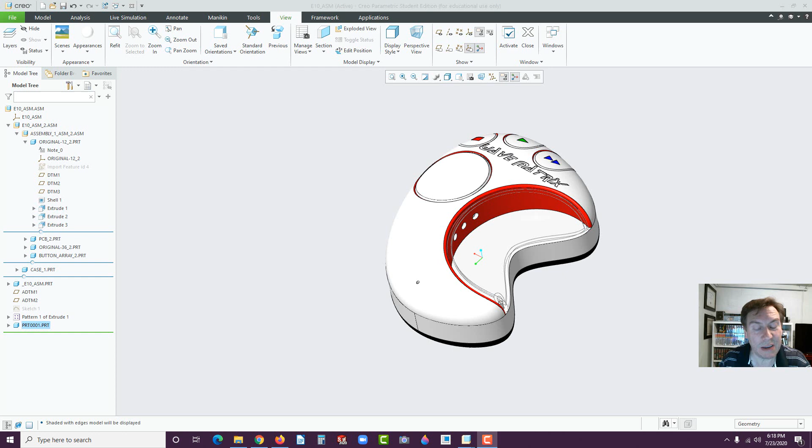In this exercise, it's what I call the real world scenario. Now, there's no way to really make that unless you're truly working at a company, but this is as close as I could bring it, you might say, without making it too overly complex and too long. Because typically projects, especially in industry, can take a long time, especially if you're handed something that's halfway through or even beyond halfway. It's almost unknown sometimes how long it's going to take. It's very difficult to judge, especially depending upon the user.

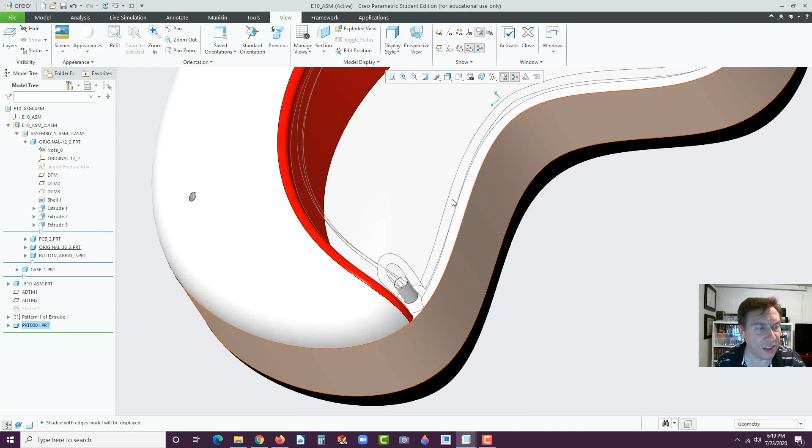So what we're looking at here is an old speaker. It's like a Bluetooth MP3 player speaker, or whatever you want to think of it like. It's very tiny, actually. What you're going to do is you're going to get this, we're going to download it, and we're going to have to put in certain features. Like, for example, it has a hinge for this case that pops out, and you can wrap up your headphones and put it in there. Now, the hinge, you'll see inside that there's actually a hole and there's a post. The post doesn't exist. We have to put the post in. You can see it done there, but that's what it's going to look like.

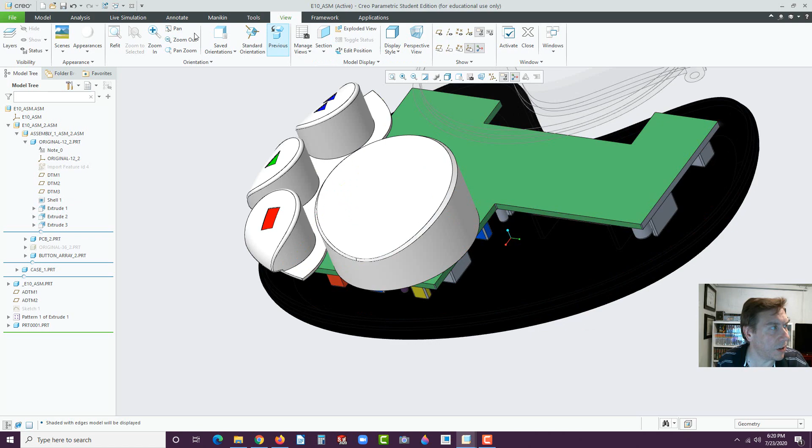Also, this is the speaker or LCD screen, whatever you want to call it. I'm changing it now to a speaker because MP3 players have kind of gone the way of the dodo. Anyhow, so we need to build this, and that's attached to the circuit board that's inside here. Another thing that you're going to have to do, I'm going to go ahead and open this up. Actually, let's hide this part. And it's difficult to see. Let me lighten that up a bit. There we go. Now, what you can see in here, this is the battery cradle. That goes in there. Let me hide this part too.

We're going to need to make this. This whole part here is going to come solid. We have to shell it out, put this lip on here. It's 50 thousandths thickness, and then the height is going to be 100 thousandths, and it's going to have 1 degree of draft. So we're going to have to learn how to put that in there. And then the cradle we're going to have to build. Now notice there's no straight edges anywhere. So to build this cradle might seem a little daunting at first to a new user, but I'm going to show you some tricks that make it actually really easy, where you're not having to measure anything, quite honestly. You're just drawing in the geometry off of the circuit board.

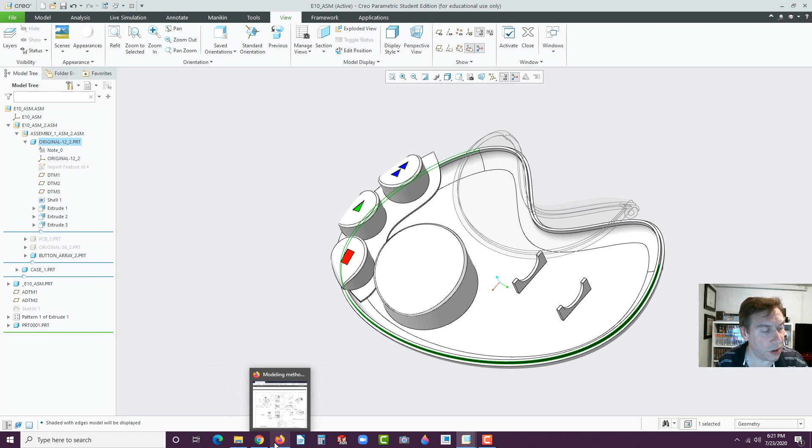So we see here the exercise 10 parts. What you're going to do is you're going to click on those parts. You're going to hit download. And you can just hit open wherever they are. And it's going to bring up Windows, and actually in this case Explorer. And you can actually see here, you can hit extract all. That's one method. I usually just select all that, right click, copy, and then I'm going to go to my Creo folder that we started the first day of class.

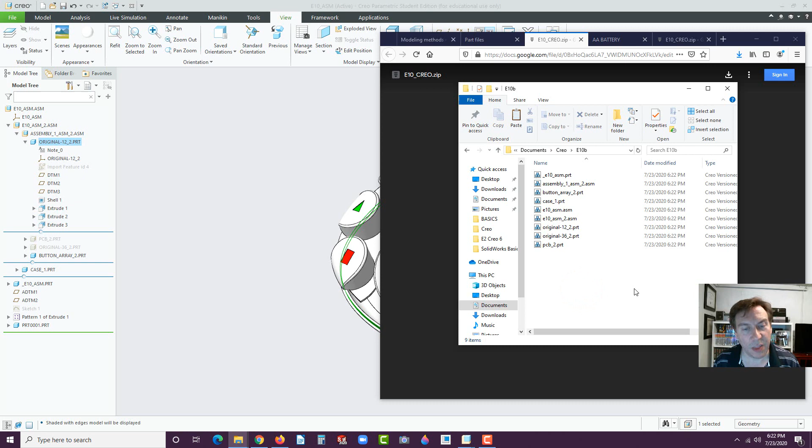Remember, you could go in Documents and create your own folder. Just right click, go to New Folder. I'm going to call mine E10B because I already, so you can see the image up there, I already brought it up. And E10B, I'm going to double click, right click, and paste all the parts in there. And you can actually click on it and see that there's some things there.

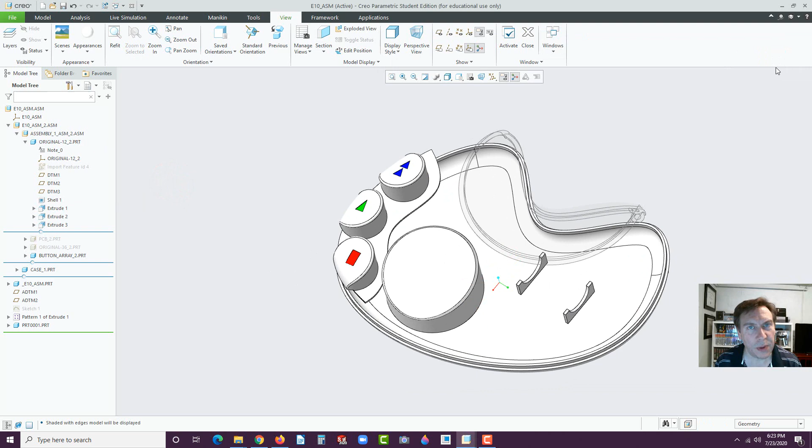Now, it is a little confusing here. When I zip this all up, you'll see that there's a couple E10 assemblies. You actually just want the E10_ASM. You don't need these other ones that are there. Those are revisions and things, so don't worry about that. But I'm going to go ahead and close this up and restart Creo.

Okay, so I restarted Creo from scratch. You didn't necessarily have to do that. I did it because I already had these parts up and I didn't want to have the finished parts show up. And you can see I have them extracted in my E10B folder. Yours could just say E10. It doesn't really matter.

Now, you don't usually want to open up the files from Explorer here. Sometimes with Creo, when you download, especially the student files, there's like Creo Simulate, there's a couple different applications, and it might actually launch into one of those other applications when you double click on it. So just be aware that you want to open them through this area here. You go to Open and find your Creo folder that you created, and there's my E10B.

I'm going to click on it, and we just want the E10 ASM.ASM. You don't want the ASM_2 or the assembly one. There's a couple sub-assemblies in here that we don't want. So it's just this E10 ASM, hit open, and we could see the assembly here.

It looks a little different. I changed the colors earlier, but we're going to go ahead and tinker with this. So we could turn off the planes actually and these other things. We don't need to see those. Also, this little ring, you could hide that. All right, now we're going to start off.

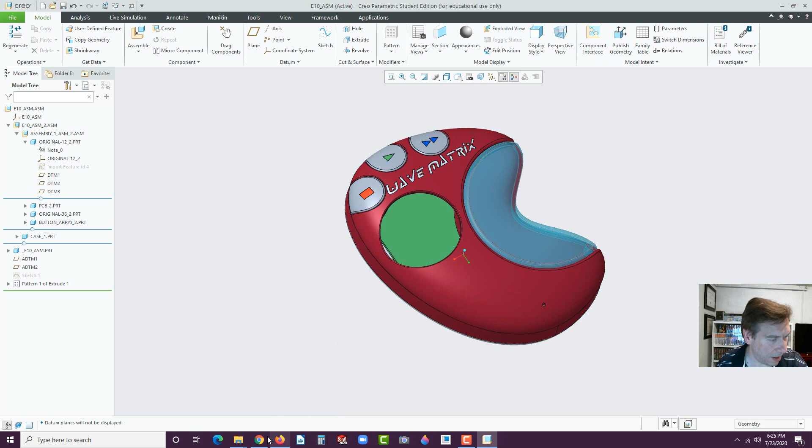And if you look at the training guide here, let's bring up the training guide. This is what you get. And this is on the second page of this. It's page 95 of your training guide. I already downloaded it and I rotated it. I just went over here to rotate. This is in Firefox. All right, so we could see here, this is the instructions.

And this is what I mean by real world scenario. When I worked in industry, not only did I create redline markup drawings, I actually got them quite often from my manager. I used to work in a mold shop and I worked for an engineering firm. And basically, a manager knows what needs to be done. They talk to the salesman who talk to the customer most likely, and then they give you the list

of instructions. And they typically have a drawing, and it's like, let's grab a drawing that has the most images on it, and let's start writing this in. And usually they take a red Sharpie or a red pen and they mark up just like this. This is actually better than what I would get typically. And they don't want to write a whole bunch of things down. Some of the expectation is that you might come back to them, ask them some more details as you need them. But you do need to extrapolate some things on your own.

First of all, the AA battery, mate the AA battery into the socket. We'll leave that for last because we don't have the cradle set up over here anyhow. But we could mate it onto this, but you're going to have to build that. I just showed you where you could get that drawing. Or what I tell my students sometimes, just take a battery, take a caliper or a scale and measure it. It's really easy, and then model it up. Those are things you don't want to waste time talking to your manager about if you can help it, because that only takes a few minutes to model.

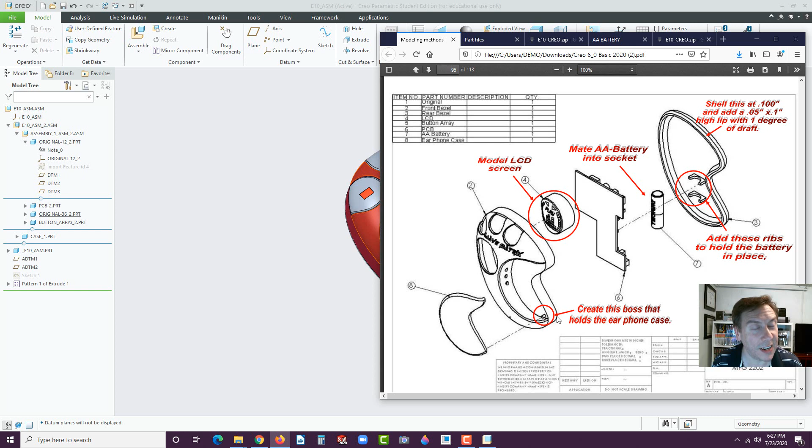Now, as we look here, we could see this is a mixture of bottom up and top down. So the battery is bottom up because we're going to model that probably outside, bring it in. And then some of these other parts we have to model from scratch, and then there's some part editing too. So let's first try and get this LCD screen or speaker, whatever you want to call it nowadays, a Bluetooth speaker. I want to change the name of this eventually.

And so you can see there's a lot of confusion over here on the left, and it's just sub-assemblies inside assemblies. So I'm going to hit those little arrows up to simplify it a little bit. I'm going to go to Create. And then over here, instead of LCD, I'm going to call it the speaker.

And part solid, hit OK. And we're going to use copy from existing, inch-pound part, hit OK. And what I recommend doing here is go to default. And we discussed that before. Hit OK. Now you can see the speaker listed there. Hit the speaker and edit the speaker.

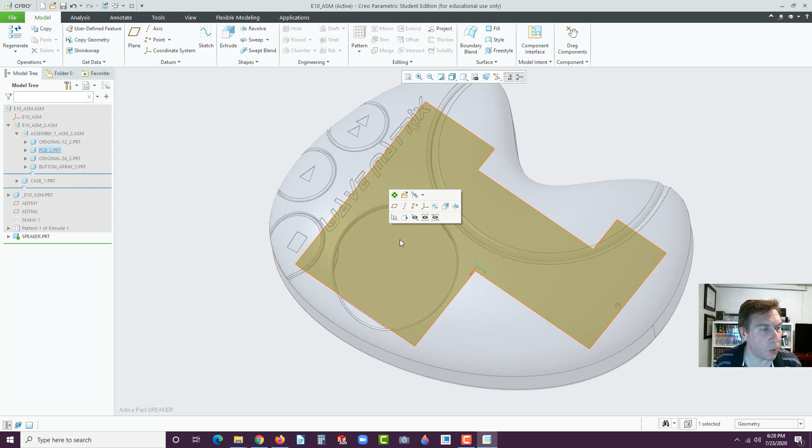Now there's the circuit board, and it's supposed to rest on the circuit board. And this you would find out typically, like the boss would say, hey, make sure you put that, that's going to be mounted onto the circuit board. So what we can do, we could select the circuit board and go to extrude, because we're going to extrude the part off of that.

And now we want to steal the edges here. So I'm going to use the concentric circle and capture this inside edge, click, and drag it out a little bit. And don't touch the edges. That would make it line to line. It wouldn't fit very well in there. We're going to give a little offset here. Click, middle click 2 times.

Now the hole, I bet you, is 2 inches in diameter. We're going to make this 1.95. So there's just a little bit of clearance in there so it could be assembled easily. Hit OK. Now as this extrudes up, we don't want it to extrude up like that. We want it to follow the contour of the outside surface, which looks kind of like a bean shape.

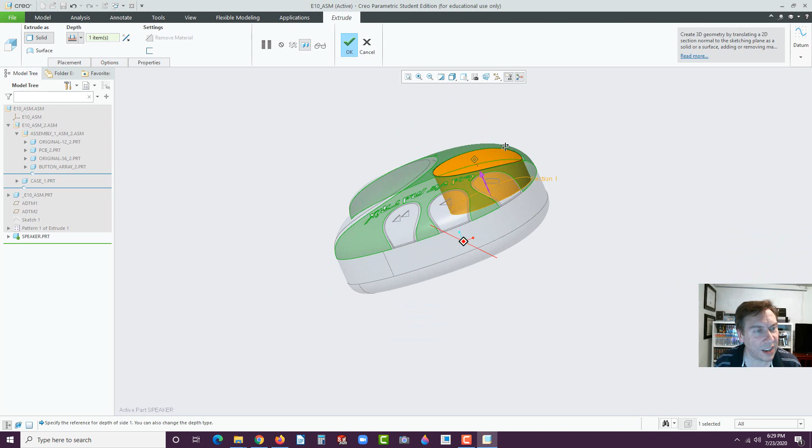Let's go over here to depth and change it to this little guy over here. Extrude up to selected surface. Now select this surface. Look at that, it conforms to that surface. Hit OK. Now, it's not in the print, but let's put a little chamfer on there. Just make it look nicer. Go to chamfer. You can set it to 0.05 D times D is good. Select this edge. And there we got a nice little broken edge.

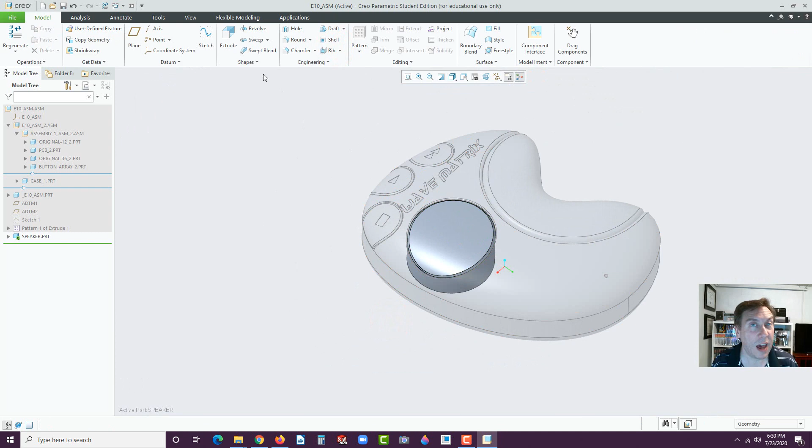Okay, we're done with that part. We don't need to do anything more. So what you want to do is click on the very top of the model tree here, where it says E10, and click on activate to get out of that. All right, so one down. Looking back at our instructions, that's done. Let's do this now. Create the boss that holds the earphone case.

So really that boss is attached to this front cover, the front bezel. And these are not called front bezel, as you can see here. So what you do is you click on the part that you want to edit and just activate it from here. So make sure you click on the red bean and activate it. And it's going to give you this little message. It's because there's sub-assemblies in here. Go ahead and hit confirm.

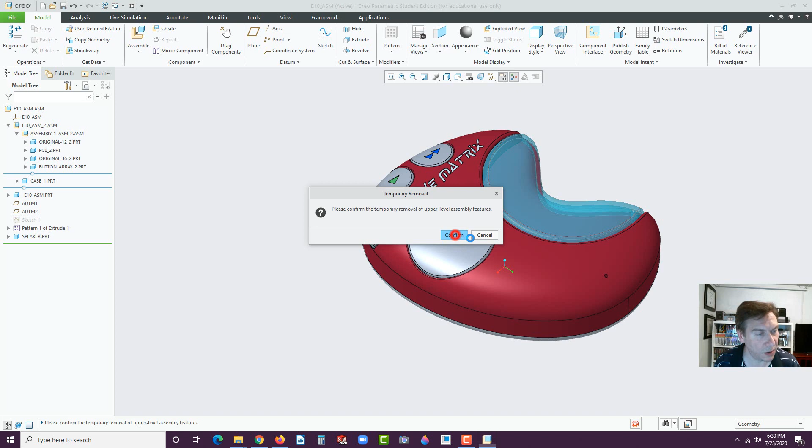Okay, now zoom up to that area down below here. You see where I'm at? And there's a little flat face. Let's go ahead and select that flat face and go to extrude because we want our post to come off of that. Now we're not going to go into the engineering details of creating bosses and mushroom clips and all that stuff. That's for an engineering class, plastics engineering. I'm just showing the basics.

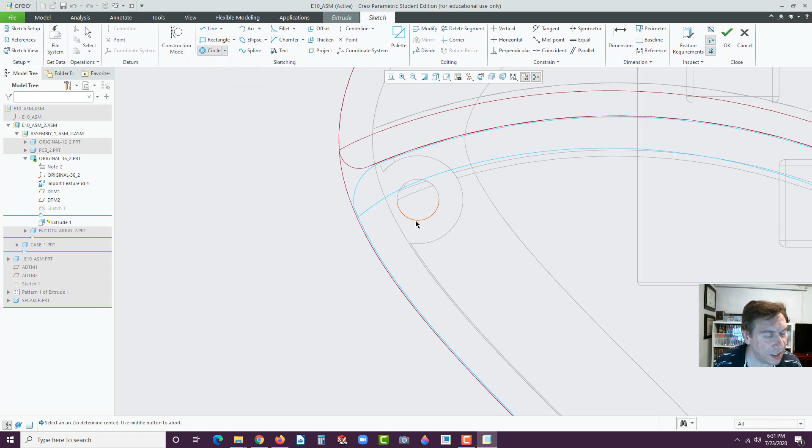Okay. Now I'm going to go ahead and go to hidden line. And there we could actually see the hole that our post needs to go into. So use your circle again, and notice it's concentric circle that we're using. Click on this edge, drag it in a little bit, don't make it equal, have it spaced out a little bit, again for some clearance. Middle click 2 times, find that dimension, 0.12. So it's 0.120, it's actually 0.125 for the hole. So we're, again, giving a little bit of clearance.

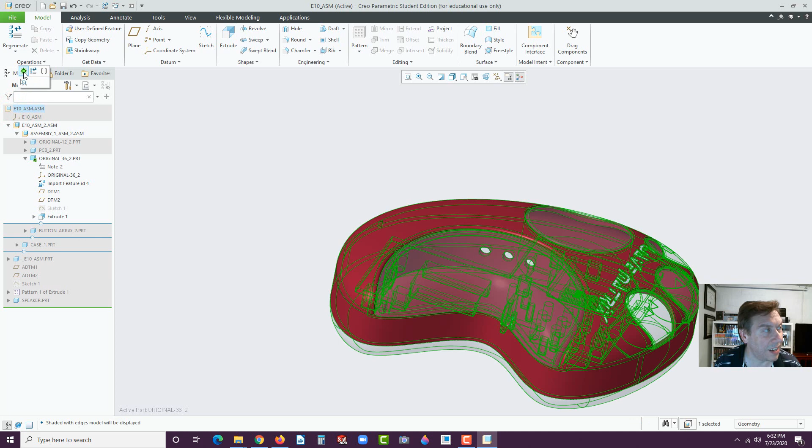Hit OK. Rotate this, and it's going to be 0.2 for the height. Hit the green check. Let's go back to shade with edges, and there's our post. All right, 2 down. Oh, we're done with that. So we could actually click on the top of the model tree and activate the model tree, so we're no longer in edit mode.

Now the next one is actually adding the geometry on this part. So click on this part, and we're going to actually open it up separately from the assembly to work on it. Could we work on it in the assembly? Absolutely, but there's a lot of stuff in front of it that gets in the way, and I don't want to have to hide and then unhide them all. So it's just easier to click on the part and go to open, and it'll open it up, and it's outside of the assembly now. Look at that. Now we could do all the work we want on it.

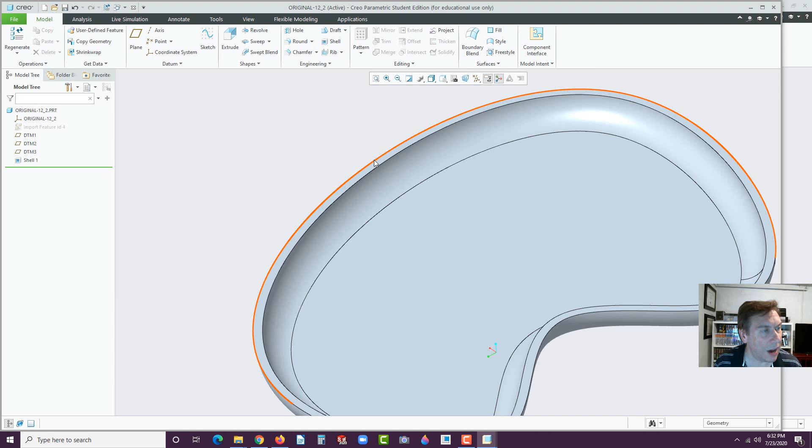Let's go right away, click on this face, go to shell, and the shell thickness should be 0.1. Hit enter. Now we need to create that lip around here. So go to extrude, select this face right here. And we're going to go ahead and offset this geometry. So we could go to project first of all. Select the inner edge. First, go over here to chain. Select this inner edge. See, it's the second edge. And then these 2 edges. And then hit yes. It's going to create a loop. We got a nice sketch there.

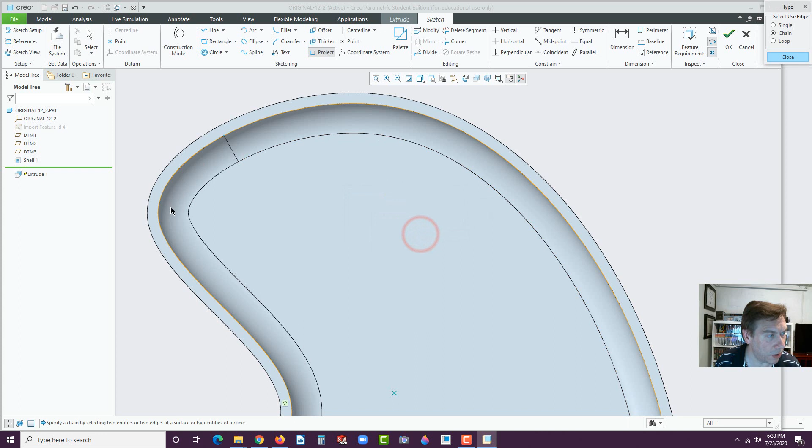Let's do that again. This time though, let's do an offset. And we'll do chain. Select that curve there. Select this curve here. And I'm going to cancel out. I should have zoomed out earlier. It won't let me do that just yet. So let's zoom out here and make sure the whole thing's in there. Let's try that again. We're still in chain. Select this edge here, and then hold control, select that inner edge.

Okay, this is what I was looking for, the arrow. Which direction was it pointed? Because that will tell us whether we have to go plus or minus. In this case, it's going the wrong direction, and we can't really flip it. I don't think so, no. So we have to type in minus 0.05. Hit the green check. All right, now it made it a collection of polygons. And do you want polygons? Probably not. And the problem we are experiencing here is that we selected the curves that we copied over versus the actual edge of the model.

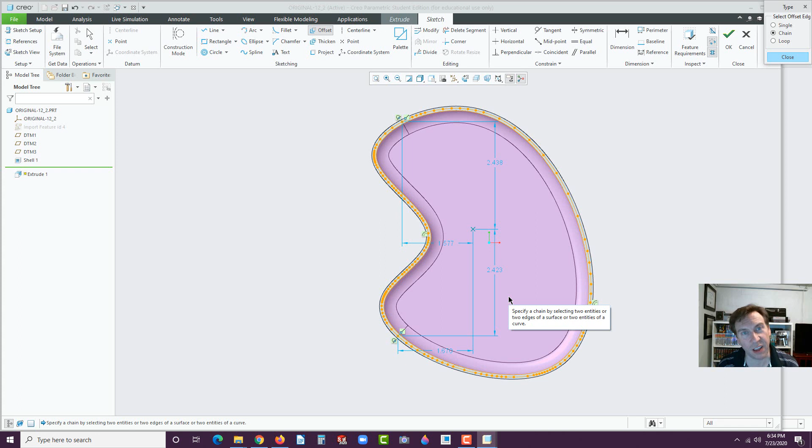So hit close here, and let's hit undo. Get rid of that. So here's a better option. Let's go now to offset, chain, and select the outer edge instead. Now I'm going to hold Control, select that, and it looped around for us. I'm going to go ahead and hit accept, and it's going to ask, you want to create a loop? Yes. All right. Again, we can see the arrows in. So in this case, we do want to go in because we're starting from the outside versus last time we started from the inside. So this is not going to be a negative number. It's just going to be 0.05. Enter. And look at that.

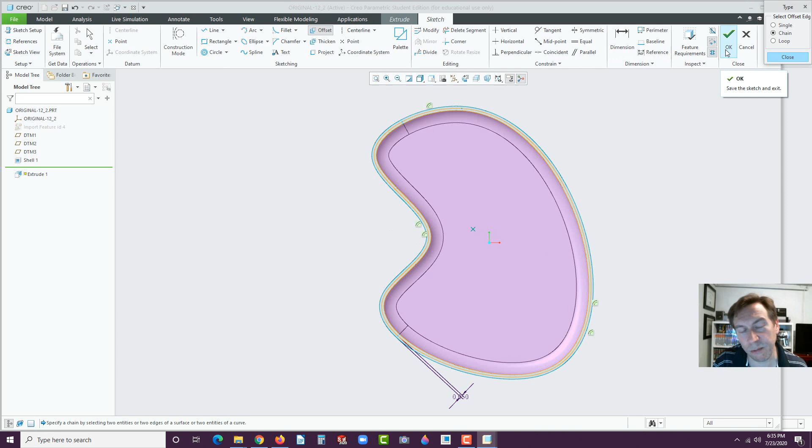It's not a polyline. Why wouldn't you want polylines? Well, sometimes some old machines like polylines, whereas they don't like these freeform curves, which are called splines. Especially older machines, 1999 and older. Typically, with those machines, you've got to be careful. Some of them like polylines, which are a collection of a bunch of little arcs or lines. They can't handle spline geometry. Any new machine pretty much these days can handle it. But just be aware that might be an answer for you if you're ever working with someone who has an old machine. Okay, I'm going to hit OK.

Now we can see it's immediately trying to extrude it. Let's change that extrusion depth to 0.1, hit enter, but we're not done yet. Go to options and add a taper, and the instructions were to add 1 degree. So we have the taper here. Now it's kind of hard to see sometimes with the preview. So what I do, see the little ball, I zoom up to the little ball, and I try and align myself to it. And now I clicked on it, and now we can see that's going the wrong way. Look at that, it's flaring out.

I'm holding on to that little ball and I'm dragging it. And we actually want it to be 1 degree. There we go. Okay. So that's one way you could see it, especially with 1 degree. 1 degree of draft is very difficult to see. Quite honestly, it would be much higher than that, most likely. Hit OK.

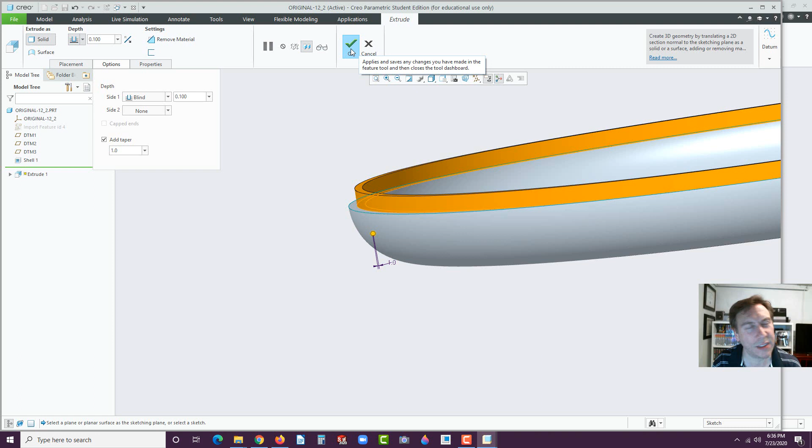Now we want to put in the cradle for the battery. And it's not a single sharp straight line on here really, unless you're looking from the side. So that does no good. So what we're going to do is go up here, click on this, and go back to the E10 assembly.

And let's hide this part. Click on the red part, go to hide. And there's our cradle. In fact, if we want, we could hide this just so you can see what we're dealing with. Okay, so we have all of our stuff on our circuit board, but here is the cradle. And see these red bars are what we want to align to. So it cradles the battery on both sides so it doesn't wiggle around.

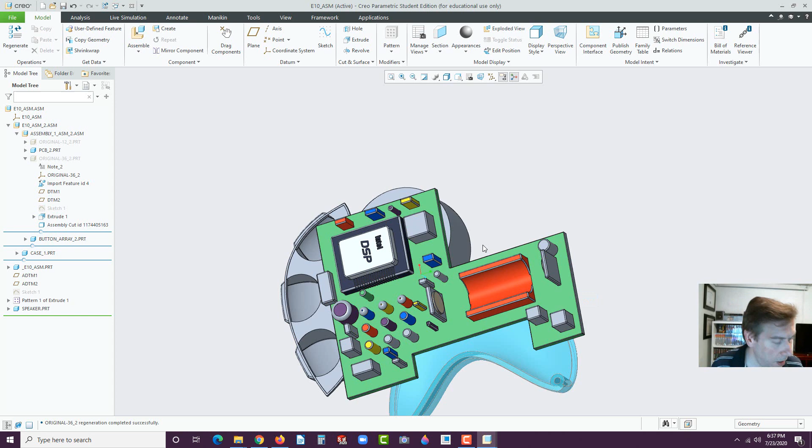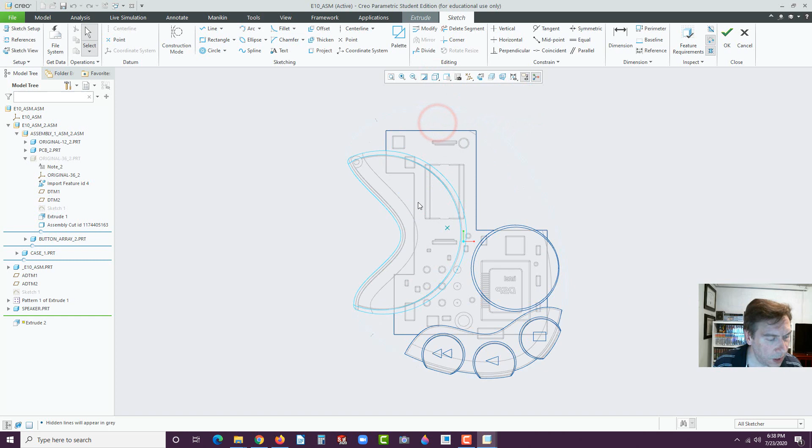So let's bring back that part. I believe it's the original 12. Yeah, original 12. Show it. We don't need the other original one there. Okay, select the floor of that part. Go to extrude. Now, go to wireframe or hidden line. Zoom up to where the battery cradle is. This is the battery cradle. Okay, if you're looking, the whole thing's upside down, to be honest.

But what we want to do, look at, there's fillets on here, and it's going to make it difficult to actually draw this geometry off those fillets. So go to references and select this outer edge right here and this outer edge here. And you'll see now we have a theoretical sharp corner to snap to for that. Let's do the same at the bottom here. This outer edge here and this edge here.

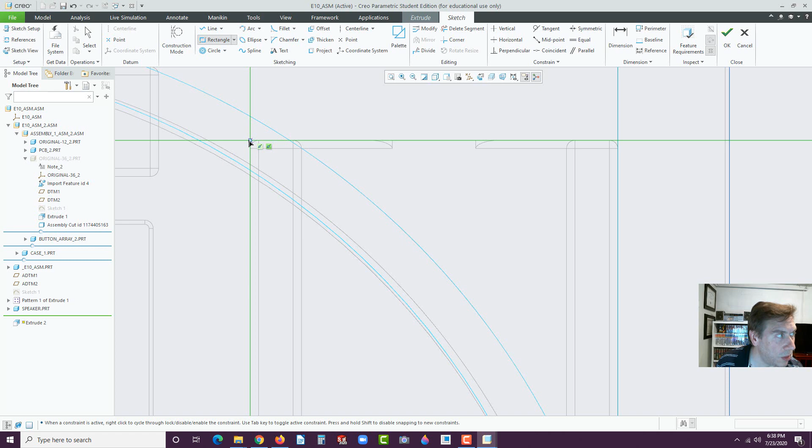And then hit close. Now we could go to the corner rectangle, zoom up to this theoretical sharp corner that we just made with the references, click, drag this across just like that. Now zoom out and let's get this one. Click here. And now what we're looking for on this edge is the equal symbol. That means we're making it equal to the other one, as long as it's small. Actually, let's try and zoom out so you can see this. There we go. Click, middle click, and then this one controls the wall thickness.

Now, plastics engineering, I know I said this isn't a class about it, but we want it to be somewhat realistic. On a plastic part like this, there's the 60% rule. Internal ribs should be no more than 60% the thickness of the actual shell of the original part. And the reason for this, if they're the same thickness or bigger, you get sink marks because the plastic shrinks because there's those large volumes of plastic. And then you get a wobbly part on the underside surface. So we don't want that.

So the overall part thickness was 100 thousandths, 0.1. So we'll make it 0.06. So double click here, 0.06, hit enter, hit OK. Now let's shade this because it's difficult to ascertain what we're looking at. All right. Now we can see they're going in the wrong direction, so we can flip that.

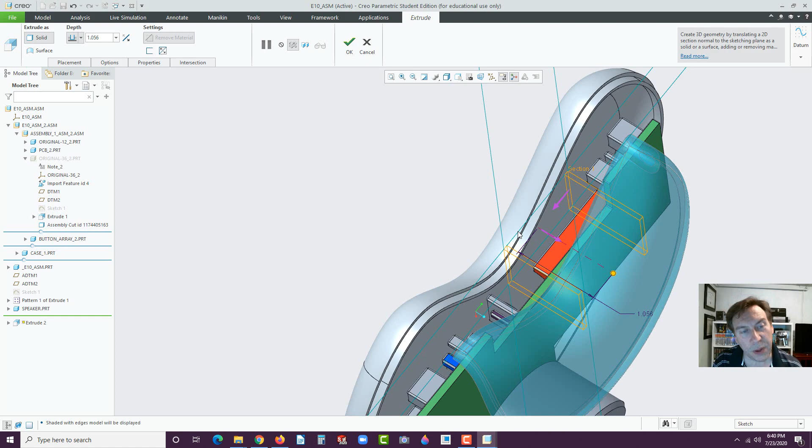And what we've discovered here is what I did in last lesson again. And this is very common. Could happen to anyone, even a person who's been using it for 20 plus years. Okay. What I neglected to do is edit the part. And so there is a time-dependent feature, as they call it in some systems, and essentially it will let you trim and cut other parts around it if you're in the edit of the assembly. But be warned, if you ever go to shade it and you don't see it, it gives you a wireframe like this, you forgot to edit the part most likely. So cancel out of here, hit yes.

Now let's bring all this stuff up. It's a little confusing. All right, let's click on this part and edit it. I think I actually had it on edit, and I might have turned it off actually, yeah. Oh, you know what, when I opened the part in isolated, I think, maybe, I don't know. Anyhow, I screwed up. So, learn from that. That there is a priceless lesson. It's gonna happen to all of you. It happens to me on a regular basis with this.

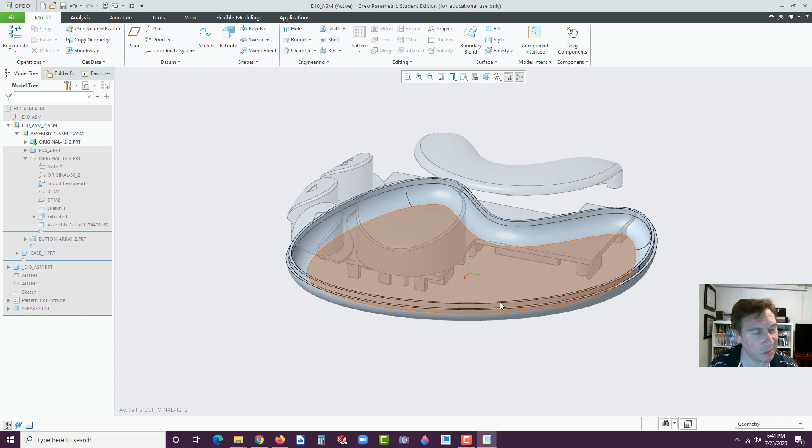Okay, now select this face, go to extrude, and let's just repeat that again. Let's go to wireframe. And remember, we use references. Select this edge here, that edge, and then the one down here. That gives us our theoretical sharp corners. The rectangle, you can get that corner now. Click here, and we'll start from this corner instead, just for the heck of it.

To there. Oh, and I forgot to make them equal. That's okay. Go up here to equal, select this line to that line. Now they're both equal. And now we could double click on this and middle click 2 times, then double click on it. And let's do our 60% rule. Hit OK.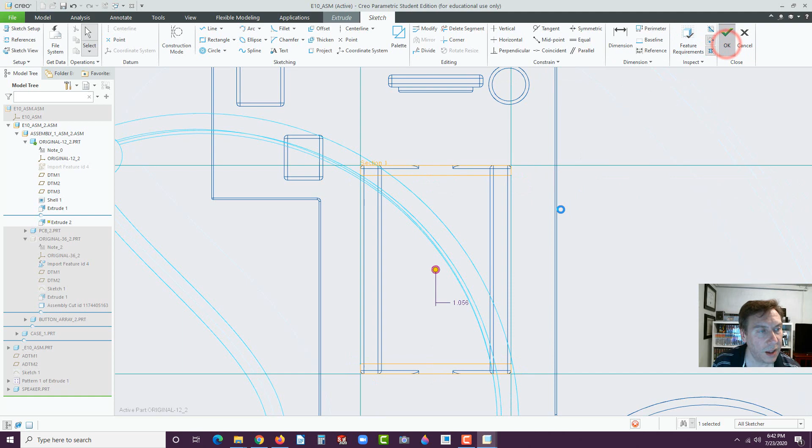Now let's shade it. Let's see what color. Hopefully it's opaque. Yes, we've got it. So there you get an excellent example from my blunder on what not to do. So make sure you edit those parts. That's why it's so important to get that green star over them.

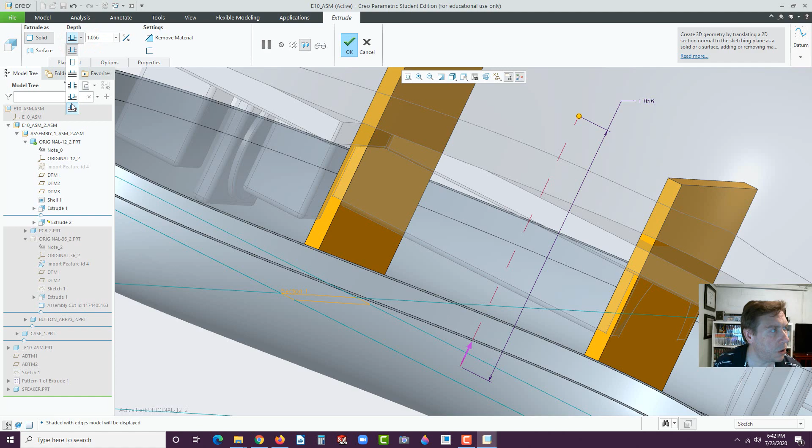All right, now we want to extrude this. So let's go up to surface or edge. So click on this. Now we're going from the floor up. And if you look underneath here, look at that, is the battery cradle right there. See the arc? And it goes down. You want to capture one of the bottom edges of it. And so it goes up to it and it touches it. Goes no further. Look at that.

We didn't even have to measure it. You could have gone and measured it. But remember, if a change ever comes down and they say, you know what, there's not enough room in here, let's make it a little bit bigger, you won't have to worry about this because it will always go up to that surface and make a nice tight contact for that cradle. Hit OK.

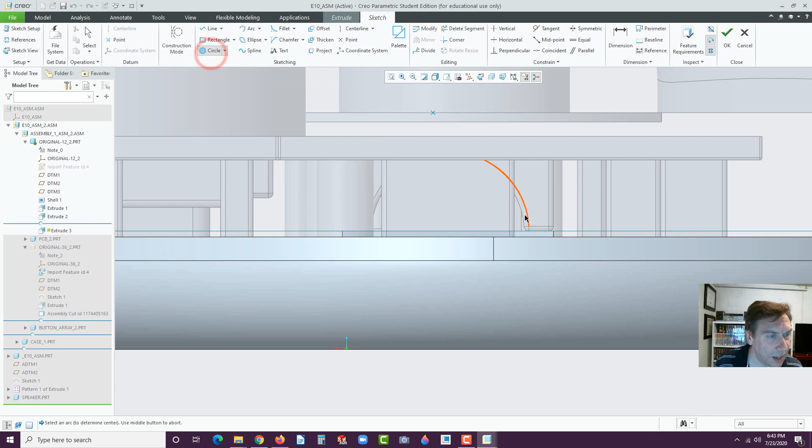Now let's go ahead and rotate this around. There they are. Let's select this face right here. Go to extrude. Now we have to make the cutout scallop for the battery. So zoom up. We went normal to, and you could see right here, there's the scallop for the battery. Let's use our circle tool again. Drag that in and just click on that edge again to match it.

Oops. You know what? Let's not use that one. Let's use the center point. So highlight that edge, get to the center point, click and drag this out to the edge. Middle click. I think we could have used concentric circle. I probably just shouldn't have clicked on that edge. I don't know. Anyhow, now that we have that.

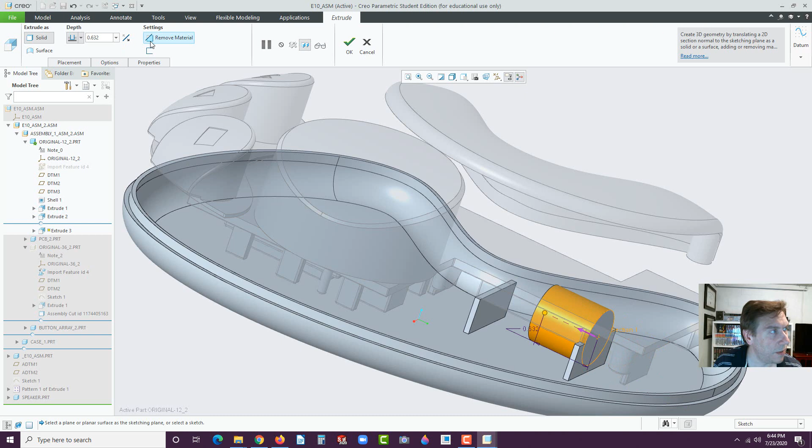Hit OK. All right, now I'm going to flip this, and we have to select Remove Material. Now, again, we want it to go up to a surface or edge, and we probably want it to stop right about there. Boom, right through. Nice preview, hit the green check. Now, we could go ahead and edit the assembly. All right, and look at that, we have our cradle.

Now, if you want to put the fillets on to match the other ones, that's fine. I don't require it. You've done enough. This is pretty complex stuff, what we're doing here. It becomes second nature, though, once you've been using the software for a while. And it's quite powerful, as you can see. Pretty neat, too.

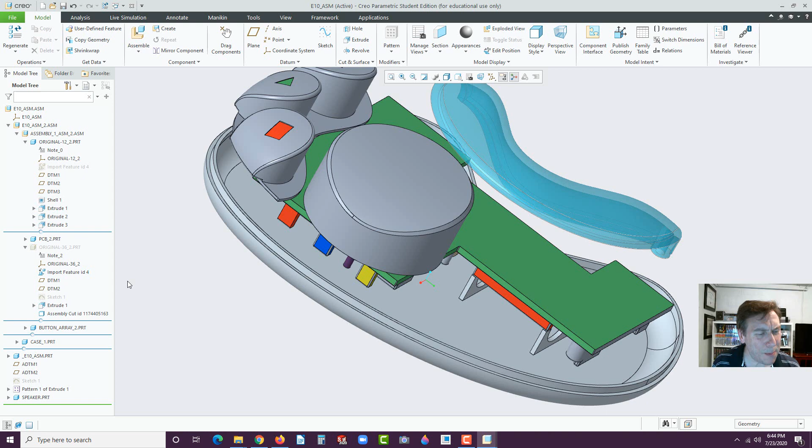Okay, I'm going to go ahead and model that battery because I just want to finish this to show you guys. So I'm going to hide this, and I'll put it in this cradle, but let's go now to New, Part, and I'm going to call it Battery. I'll actually call it double A underscore battery. All right, let's take a look at what we need here, just to show you how easy it is, and I still expect my students to make this.

Okay, there's the AA battery. Remember, it was under the part files, and E10 battery DRW, it stands for drawing. Okay, there it is. It's 2.060 and 2.160 with the tip on it. The diameter, 0.6, all right? And there's more details on here than you quite honestly really need. But, so it's 100 thousandths little tab, and the diameter there is 0.477. So let's model this up.

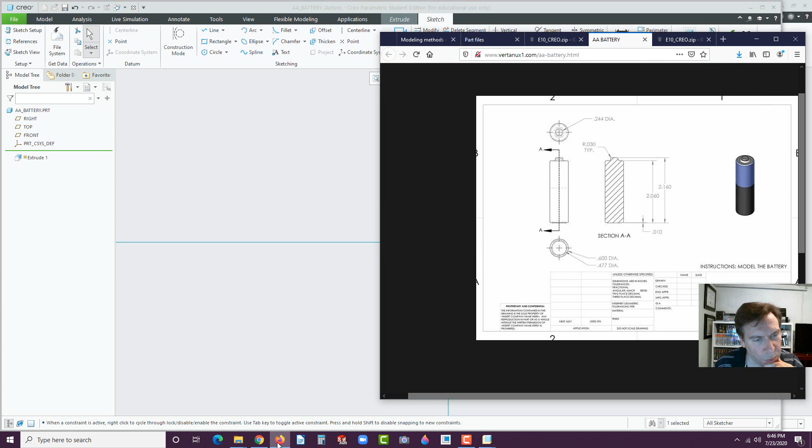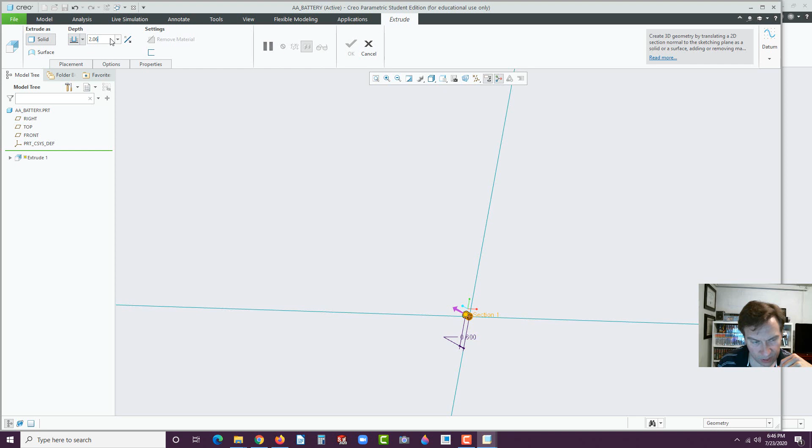So I'm going to go to the front, go to Extrude, Circle, and then let's go ahead and just match that drawing, 0.6. We'll refit it, squeeze all that stuff down in there a little bit better. Okay, now we could go ahead and hit OK. And the extrusion was 2.06, if I recall. Hit Enter. And let's refit. Don't forget to refit.

Select this face here, go to Extrude. Let's put the little boss on the top. And I think that was like some weird, like 0.477 or something. Oh, that's really big. Oh, that was for the bottom. This one's probably 0.2. All right, hit OK. And it's only 0.1 in height. And if you want, you could dress it up a little bit, put some rounds on it.

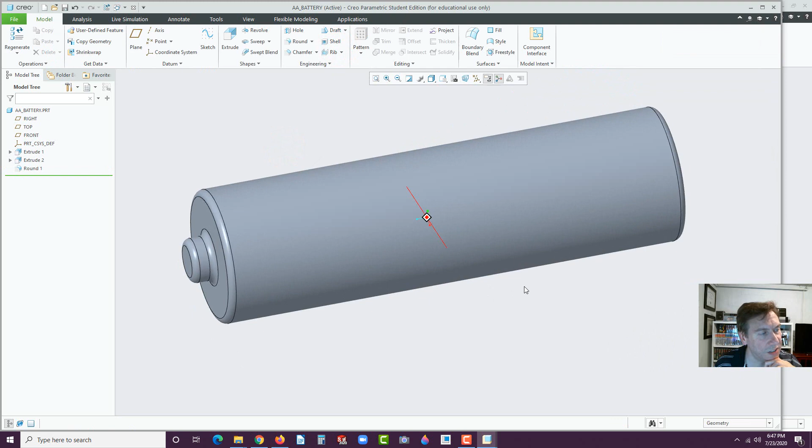I'm not going to put all those details that you saw on it. Okay, now I'm going to go back to the assembly, and we could go to Assemble, and it's in session. I didn't save it yet, so it's in session. You just find the AA battery in there. There it is, AA battery. And there we go. Okay, let's get it over there.

We could rotate it. I didn't put positive or negative down on this, but let's go ahead and we'll mate this surface to this red surface here. And we can drag that down. We could actually then, go to placement here, new constraint, select this face to that contact right there. And there we go. It's in there nice and tight.

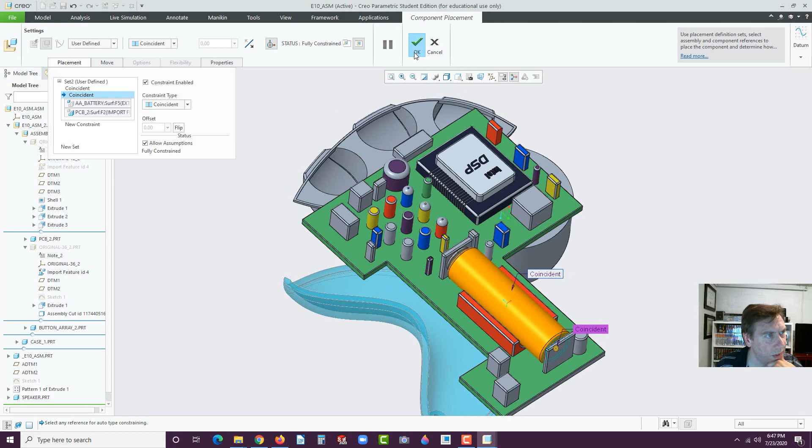If you want, you could change the color. I'll make it blue. Oh, we can make it copper. All right, and select the part, middle click, and there's your battery. Now let's go ahead and bring everything back. So the original here, you can tell which ones are hidden by the grayed out. Go to Show, and then the original 36, let's show that.

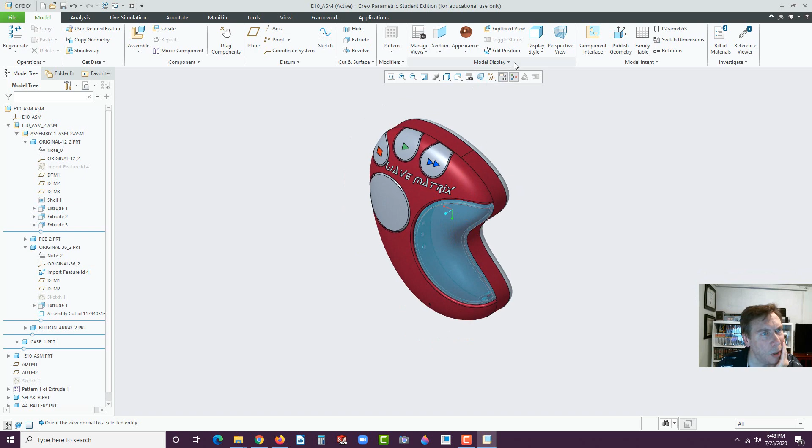And let's go to an isometric view. Well, oh, that's fine. There's not actually an isometric view in there, because this is imported. But we're going to go and just rotate it like so, and let's explode it. Let's go to Edit Position, select this face here, grab that arrow, drag it forward, select that face there, drag it backwards, select this face, drag that forward, drag this one forward.

We can rotate it, get that battery backwards. Maybe the circuit board will move a little bit further away. Give some clearance. Okay, and that completes that exercise.

Now, as far as your lab, now they're starting to get tough, okay? So I'm not going to build this whole one because this one takes a long time. And at this point, we're near the end of the semester. Next week, we're going to cover sheet metal, okay? And then we have a couple other little things we're going to talk about. But these labs at the end are pretty tough. They're good labs for you.

I'll admit, there's a couple dimensions that might be missing. If there is a dimension or two, I'll try and call it out on the video if I get that far. If not, just guesstimate. What typically you could do, you could print it out. You see the dimensions on there, take a scale, and then calculate the scale percentage of that. Like figure out how much it should be just using the scale.

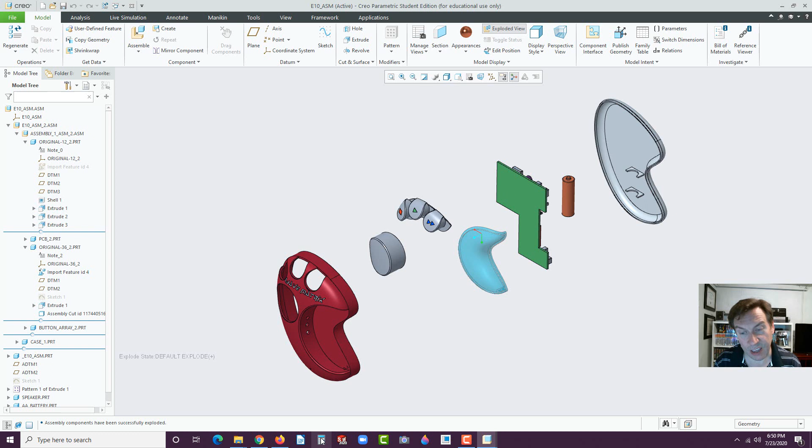Back before CAD, like in the pre-1970s, that's how they used to do it on drawings. They would actually just measure with scales and calipers and things, and then you could adjust it. So if the print is to scale, you measure something, that's actually the true measurement. If it's half scale, that's half of it, so you just double it. All right, so let's take a look at that.

In the training guide, you'll see the next page, and we're on page 96, is this. It looks a lot more challenging than it really is. It's all prismatic geometry, i.e. it's arcs and lines and circles. There's nothing freeform about this. But let's take a look at it. There's a lot to look at here.

And like I said, there's a couple areas, like that diameter, that hole I'm missing. Oh no, there it is. Maybe I fixed it. I can't remember. But you might find a couple dimensions that are difficult to find. Most likely they are in there, or like this, when I have 0.060 times 1. And when you see DP, that means that times 1, it's 1 inch deep. Okay, so just be aware.

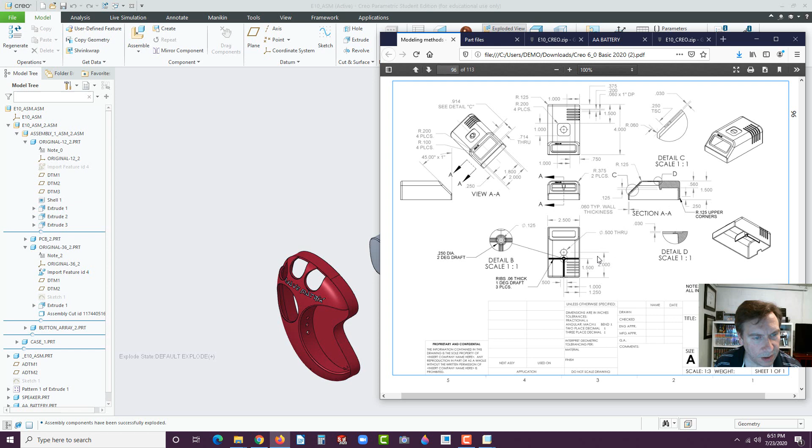There's things like that. I think there might only be one dimension, if I recall correctly, that might be missing on here. And it's somewhat easy to find once we get there. But all right, the overall is 4 inches by 1.5 by 2.5. So let's get that started. Go to New Part, and this is Lab 11C. So L11C.

You could draw this from whatever perspective you want. I'm going to actually start on the top. And I'm going to go to Extrude. I'm going to use the center rectangle. Draw that out. And it's 2.5 wide by 4. Refit. Squeeze those guys in there a little bit better, and we'll refit again. Okay, hit OK.

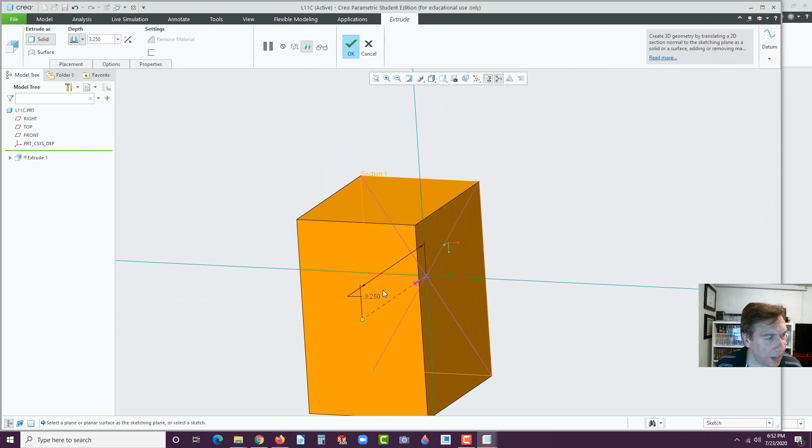And now it's 1.5 in height. I believe so, yep. And let's go to standard orientation, which is isometric basically on mine. Okay, there's that chamfer in the front. And so what we're looking at with that, here it is, 45 degrees by 1 inch. So go to chamfer.

So we could do 45 by 1. Select that front edge, and there it is. Look at that. Probably a lot easier than you thought it was going to be. All right, now let's get some of these other things here. All right, not ready to shell yet. You want to shell after you get most of the fillets in.

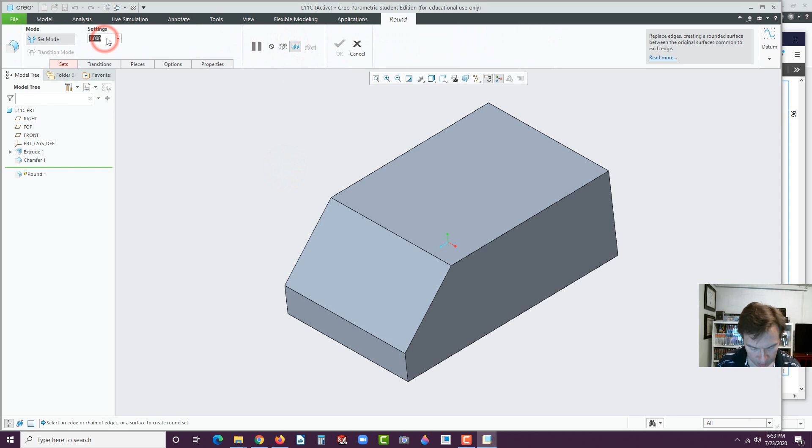Okay, so what we see here, we've got some radiuses, 0.375 on these two edges. So round, 0.375. Select this edge here and that edge, and apply. Okay, moving along here. And remember, try and go with the largest rounds first. So those are the largest, and then there's some smaller ones on the front and sides.

So radius of 0.125 there, and just make sure that that's consistent. That's where it might not be the best in this detail. 0.125 there, so that's on the front. And I think we're good, and it says radius 0.125 upper corners. So I think we're good with going 0.125 with that.

So let's go round 0.125, select this edge here, this edge here, and these edges here and here.

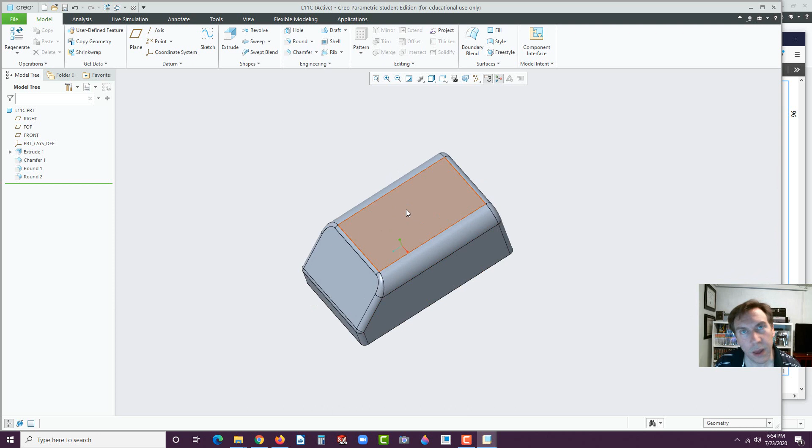Okay, once you get the rounds on there, before you start cutting any holes in, this is the time probably to shell, because if you look at it, there's really no other features. There's a recess at the top, but the recess actually, if you look at the print, comes after it's been shelled. So let's take a look at the shell. Now the typical wall thickness, that's what I usually put in here.

30 thousandths for the recess. There we go, typical wall, 0.06. So flip this around, shell, 0.06, and select this face to open up and hit the green check. All right, let's get some of the interior parts here.

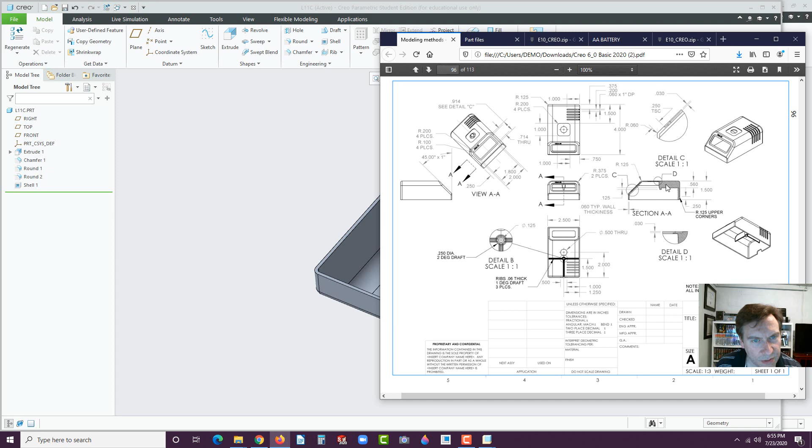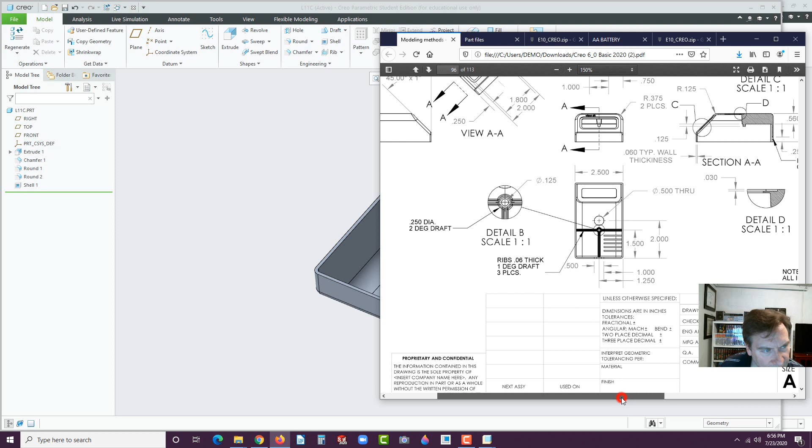Now we have some ribs, and there's a boss in the center. So I'm going to zoom up. And the detail on the boss is 0.125, and that's actually the top boss. The base is 0.25 diameter, 2 degrees of draft. And then the height right here, it appears, before that post goes in, is 0.560 off the bottom edge.

Okay, so what we can do with that, you could select this face and go to plane, drag that up, and what was it again? 0.56. Hit OK. Now click on that and go to sketch. Flipped it around. That's okay. We could go over here to, let's see, top, bottom. We want bottom.

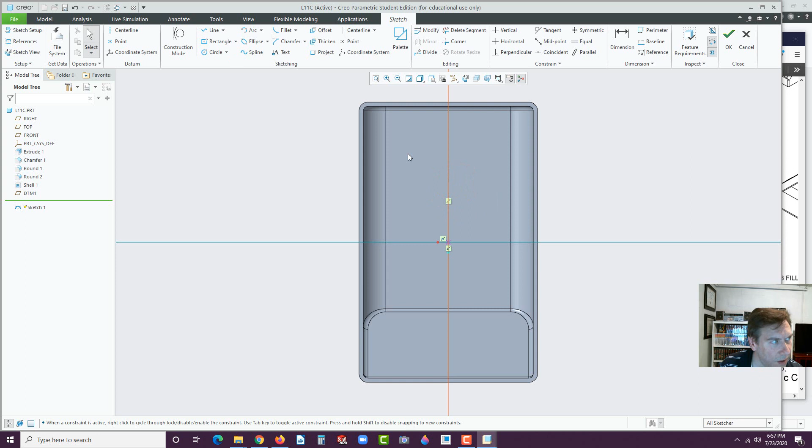Okay. Now we have to locate where that's going to go. It's a circle, 0.25, and it's 1.5 and dead center there of 1.25. So let's go with the center line. And then we'll go to the circle tool, and on that center line, right about here somewhere, draw. Darn it, I missed it. Click, click, 0.25 diameter,

and 1.5 from the back edge. So we're going to dimension that. So from here to center, 1.5. Okay, that located it. Hit OK, and we can just extrude that. Now, actually, I could have extruded off the bottom surface. I was thinking of the rib tool, which we didn't need just yet.

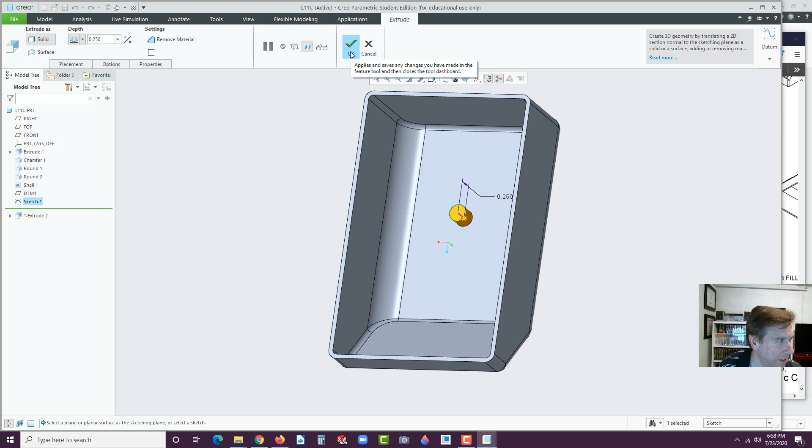I'm going to go to extrude and hit OK. In fact, actually, I could put the draft on later. Yeah, let's cancel that. I got an idea. This is a good plane that we could use later. Let's delete this circle. Or we could actually keep it there. Actually, yeah, we could keep it there.

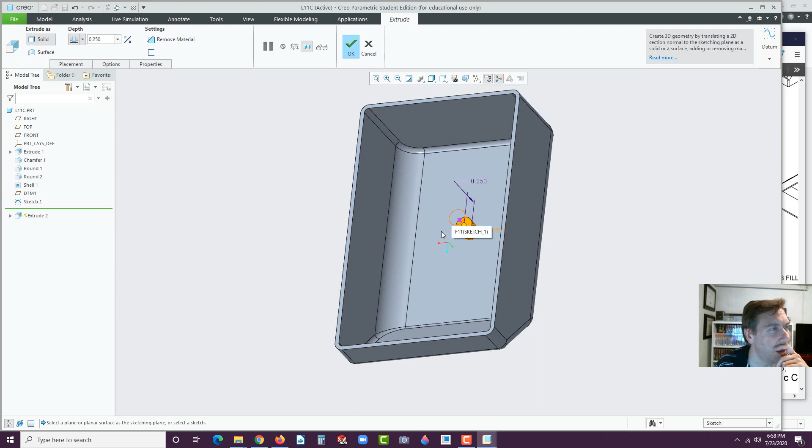We could select the bottom face, go to extrude, and then we just go to circle, highlight that, and draw the same size circle, since it's already placed and positioned. It's almost considered a little sloppy here, so your boss may not like this. I would think it was okay because you still have control over it on that plane. But anyhow, we could actually have it go up to the plane, I suppose.

That would be good. So we could select this and then have it go up to the datum, because we know the datum's the height that we want. And this is a completely different way. I've never modeled this area this way before, so just be aware. Okay, and I'm going to go to options and taper, and 2 degrees. All right. And we could hide that edge there. We could just click on that, hide that.

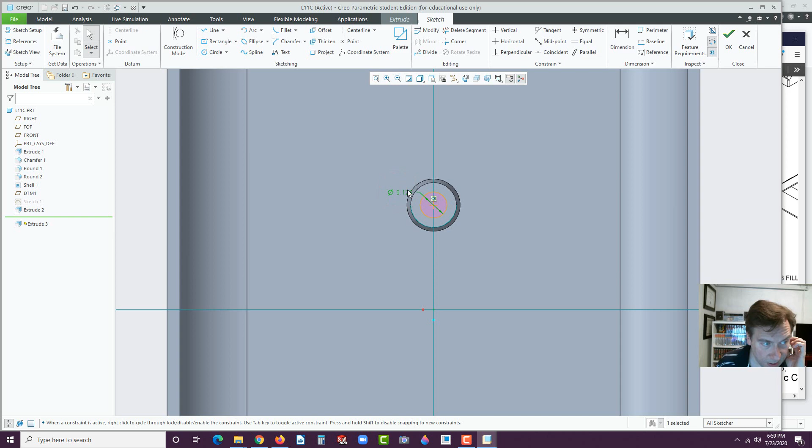Now a post goes on there. Let's go select that face, start sketch. And this is 0.125. It's in the center. Wake that center up. 0.125. And then, okay. And let's check out the height for that.

That is 0.125. See right there? Follow the area. And that's what it's set to by default. And I don't specify draft on there. We probably could, but I didn't say to put it on, I don't think, so don't worry about it.

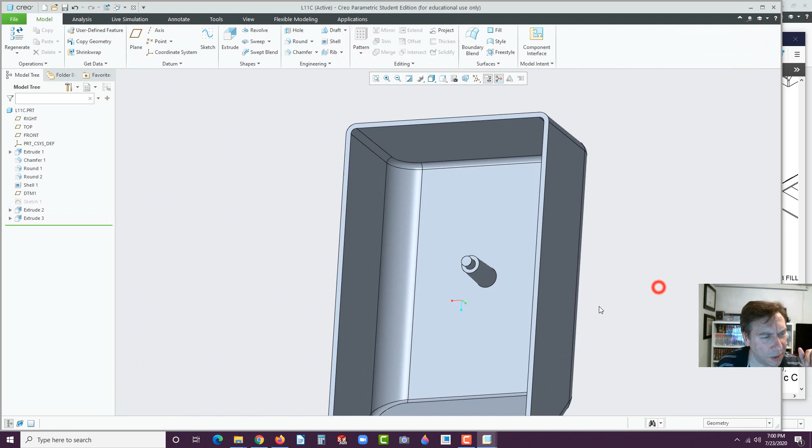Okay, now the ribs. And since we have this structure here, we can select this face, start a sketch, and add our ribs. So the ribs are nothing more than, let's first add center lines, or one center line across there, and then go to the line tool. And did we need the center line? We could have gotten away without it, but we'll go ahead and put those in. Oops, forgot one more, right over here.

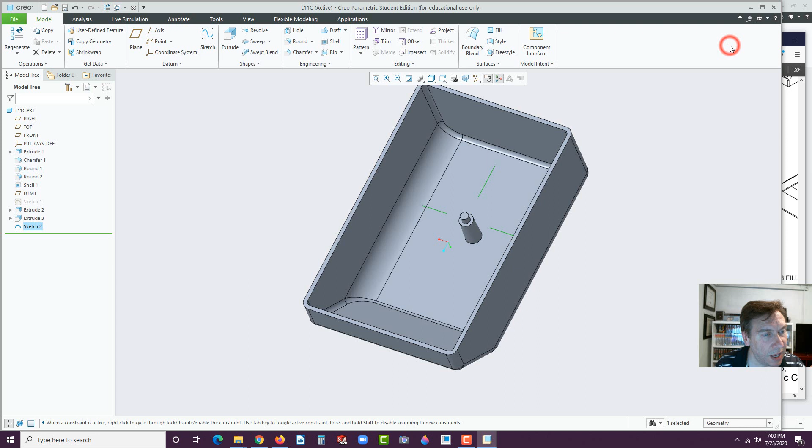Okay, so there's those 3, and you don't have to dimension them because they're just an alignment, they're just as a reference. Now we hit OK, and we could go now to the rib tool. And again, I love Creo's rib capabilities. They're just outstanding.

Okay, so we see here the ribs are 0.06 thick, 1 degree of draft, 3 places. And there are fillets called out here. I think they're 30 thousandths. I can't remember. Thought I called them out somewhere on this print. Rather than look all over for them, I'm going to just go ahead and put them in so you can see how that's done. So let's put in 0.06, 1 degree of draft.

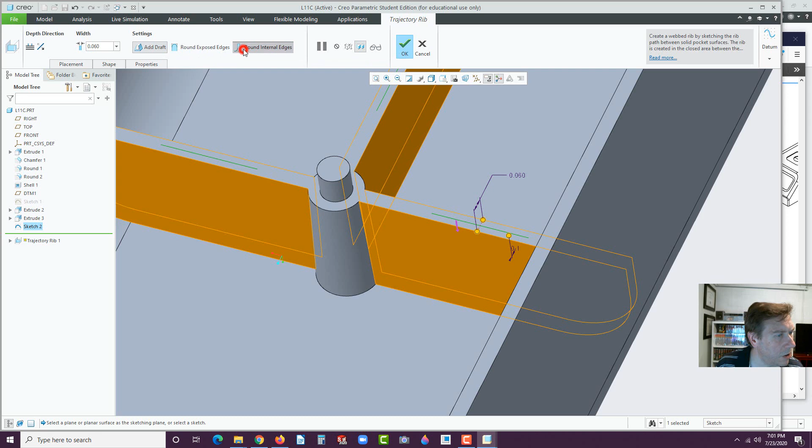And then let's see, just make sure that's 1. Yep. Almost looks like 0.1, but I think we're okay. And then we'll go ahead and round internal edges with that. And they're 0.03. Beautiful. Hit the green check. And then there is a round that goes in there right here. And it should be the same 0.03. And then here. And then here as well.

I might have even been able to put the boss in there as a circle. Not sure though. I haven't tried it. Feel free to try it if you like. Okay, so we have the structural rib.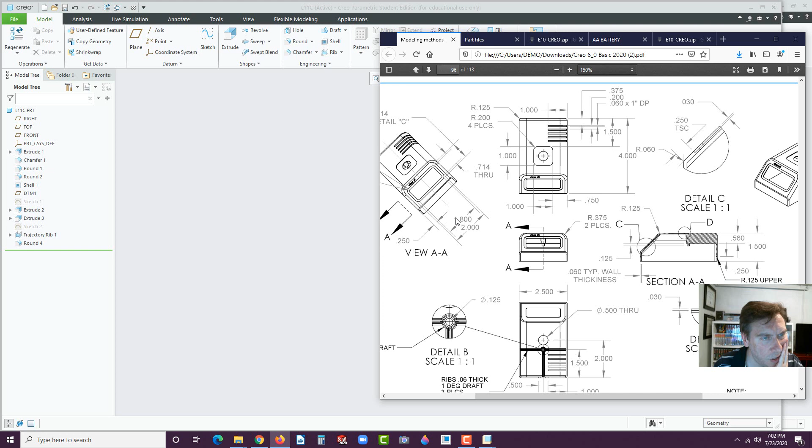Moving along here. Now we have this little window on the top, and it's position 1.5. It's 1 inch by 1 inch, and it's a recess of 30 thousandths. So select that face, go to extrude. We could use the center rectangle. So 1 by 1. And position again, let's verify that. 1.5 off the back edge.

I brought it to center, so we could have just went straight off the center there without that. That's okay. All right, I wasn't sure. Let's go to sketch. Fillet. Now you could put the fillets in as features or a sketch here. I'm going to go to the fillet feature. See, notice there's several different types: circular trim, circular, elliptical trim. We're going to go circular fillet.

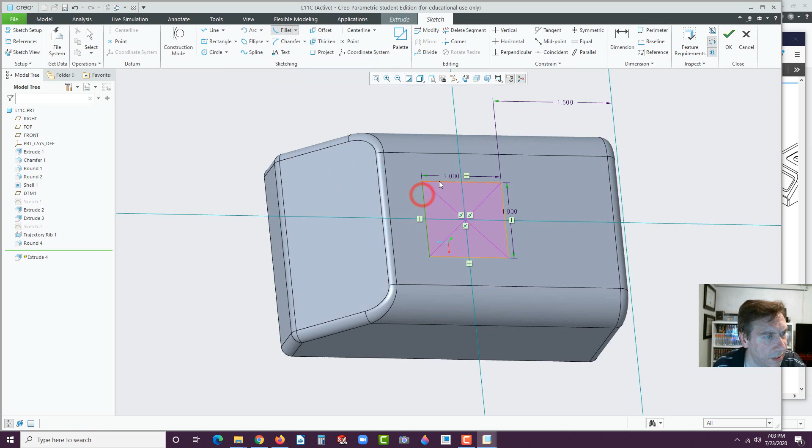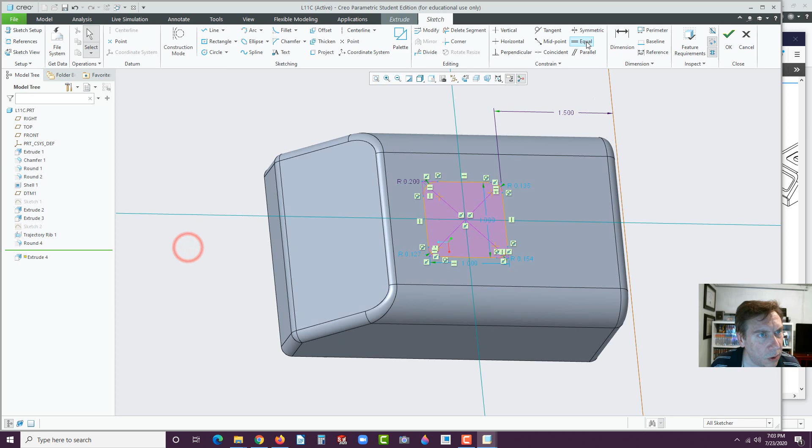And select this edge here to this edge. There to there. Here to here. And here to here. Now let's verify what those are, and we'll make them all equal. So 0.2, 4 places. So let's middle click 2 times, change this one to 0.2, and I'll go to equal and just proceed to select all of those. There we go. Hit OK. Now this gets cut, but only 0.03 deep.

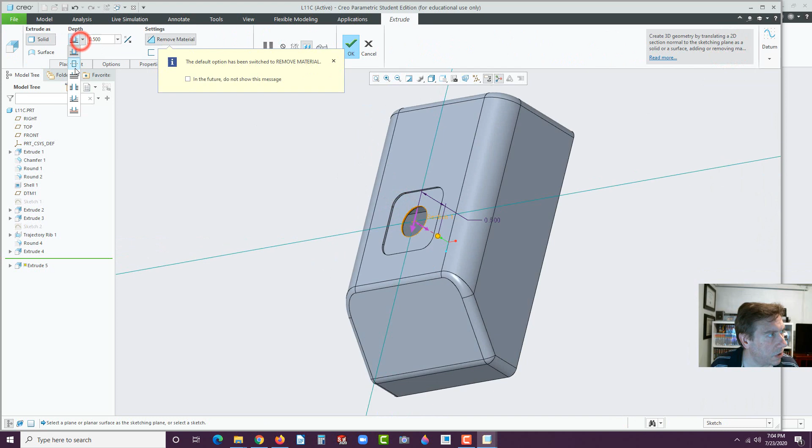And now we can select that face, go to extrude, and draw our circle in the middle. And I have the diameter for that. Yep, 1/2 inch through. Okay, flip that, make sure it's through all, and apply. All right, we're getting there.

Now, this little window for the LCD screen, select this face, go to extrude. Now, this one is a little tricky, I think. Let's see, because we're looking here, this is an auxiliary view pulled off of that side view. So we see that there's the boxes. There's an inside and an outside offset for a lens, and there's a recess. You can see the recess right over here.

But what we're looking at in this area here, let's see, we have 0.714 through, and by 1.8, and to locate that, let's see, it's 0.25 off the edge, and what are we missing here? This might be the dimension that I'm missing to locate where that goes. It looks like it follows that, but let's just try and put it in, and then we'll look on the drawing.

Maybe we'll, oh, I bet you, I think I just found it. Maybe I do have all the dimensions on here. Oh yeah, there it is. Theoretical sharp corner. Oh gosh, that would indicate we'd have to put the fillet in beforehand or do a section and make a TSC. Okay, so it's a 1/4 inch off that edge.

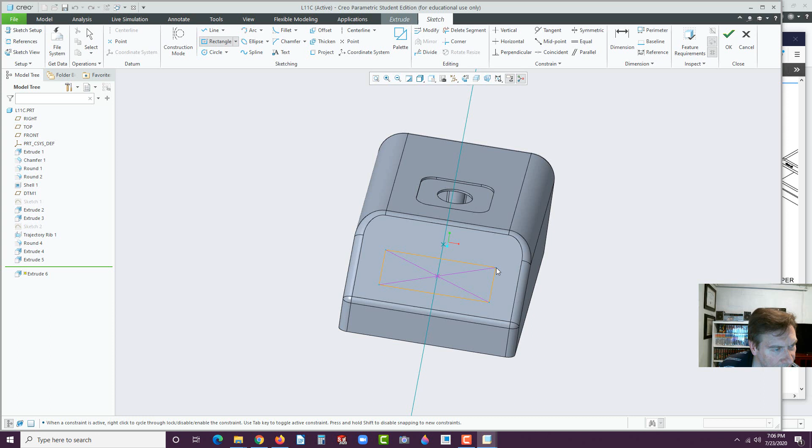All right, so select, we already selected that face. Let's go to the rectangle tool, get right up there, draw this out, and it's 1.8. And then we have 0.714.

And then it's actually dimensioned off this edge, which we don't need because it's centered. You don't need to put that one in. All right. Now the location was off the theoretical sharp corner, so I guess I should have put that fillet in later. We should be able to still calculate that though. Let's see if we extended that out.

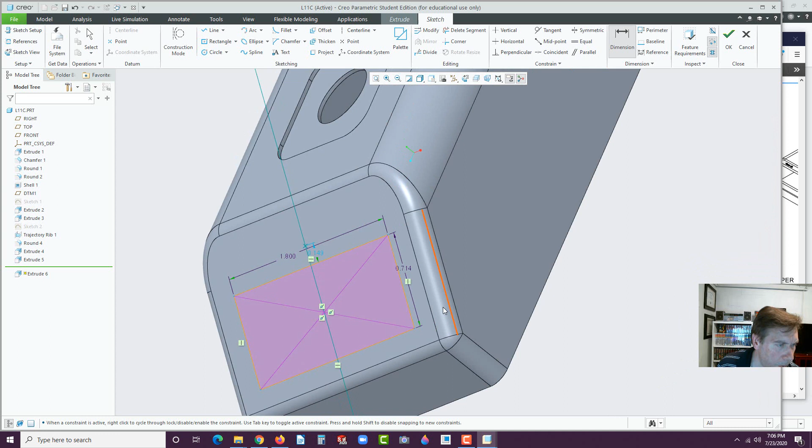We could draw. We could take this. Yeah, we should be able to do this. I'm going to take that. I'm going to project that edge. Or draw over it. Here, let's just draw over it. There we go. And then we should be able to, if I go, let's see here.

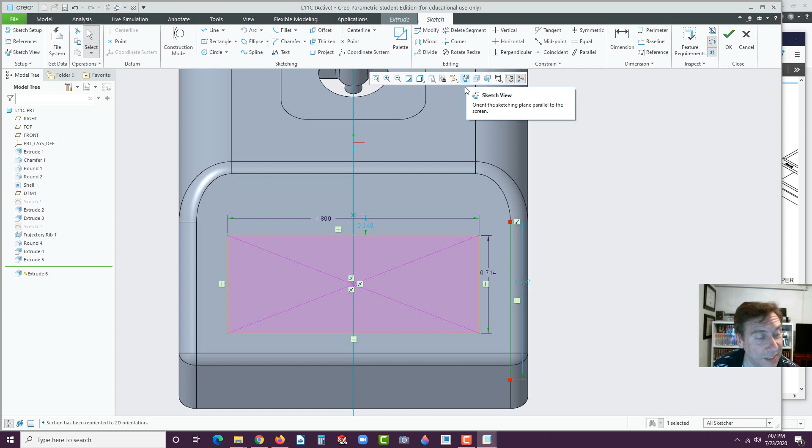Go to sketch view there. I should show that more often. I forget about sketch view all the time. If you ever rotate, the sketch view tool is just awesome. It brings you back to the orientation, especially on something like this that's not planar to front, top, or right.

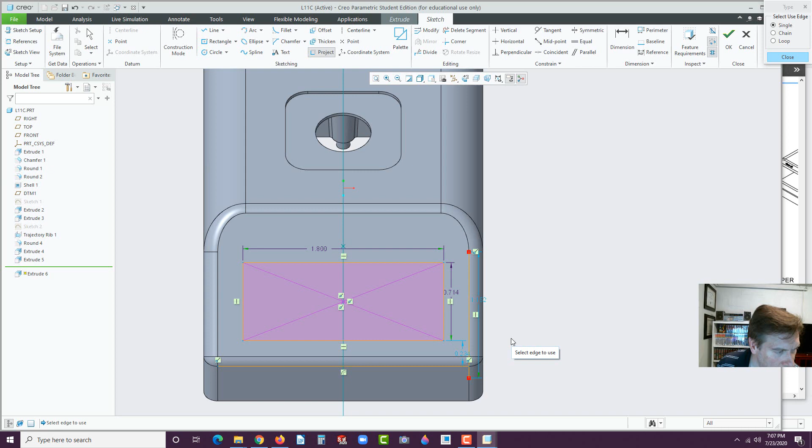Okay, so there's that. Now, in theory, let's see if we could do a projection of this. I think this will give us a theoretical sharp corner. Let's see. No, it's not. Okay. All right. It's just a geometry thing, a trig actually. I can't think of it right now, but I will later. And in class, I'll talk about it. Maybe the next time I make this video, I'll do it.

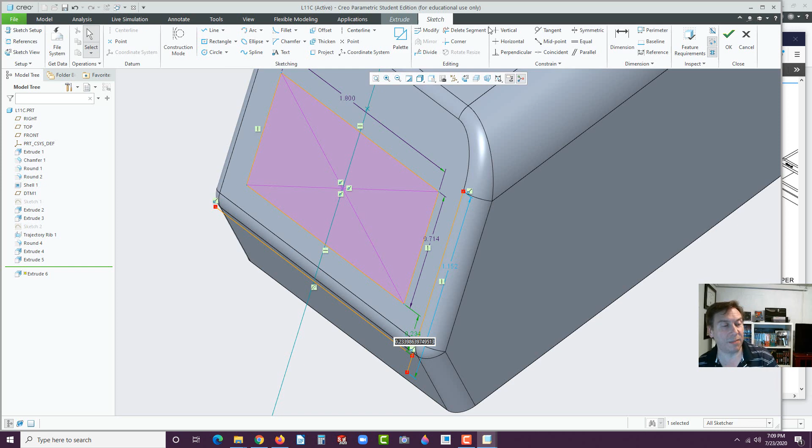I could have left that fillet off, but basically, since I'm the designer of this part, I think that was a stupid move on my part to go with the theoretical sharp corner there. Although, if I were to cut it from the side, we'd be able to get it. I could have cut it from the side, and that way I could capture the theoretical sharp corner easier. There probably is a way here, definitely mathematically, but I don't want to waste your time as I tinker with this. So I'm going to pause for a second.

Okay, I figured out a way to do it. Now, there's probably a dozen ways to do this, including mathematically. I'm going to do it using the geometry on the screen. The problem is we were trying to get this 0.25 to the theoretical sharp corner, because on the print, as you could see, right there is the front corner of that model, and it's pre-fillet, and it shows the theoretical sharp corner based off of that. And that's where the base of this first profile starts. So here's what I ended up doing.

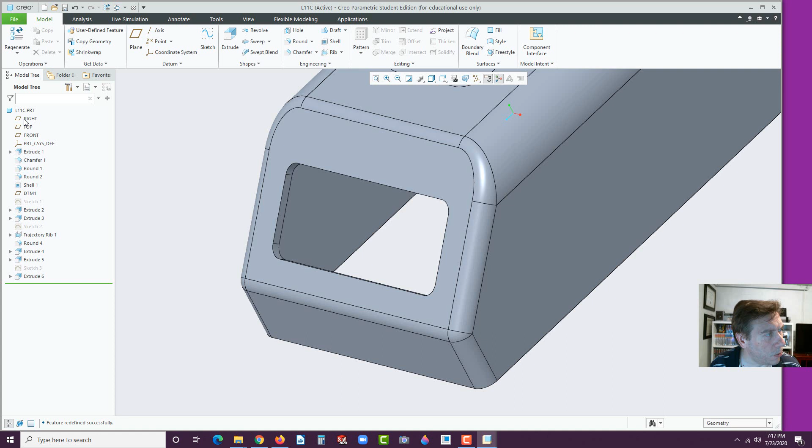Let me just go ahead and hit OK here. All right. Now what I did, let me hide this one here, just so you can see this better. I went into the right plane, which intersects right through the center of the model. See the green plane right there? And I started to sketch on it. I took the line tool, and on this bottom edge, drew up a line like that. And then off this edge, drew a line and connected it. Middle click. Leave that as a line, but this one you could click on in terms of construction. Now when you hit OK, you now have a reference.

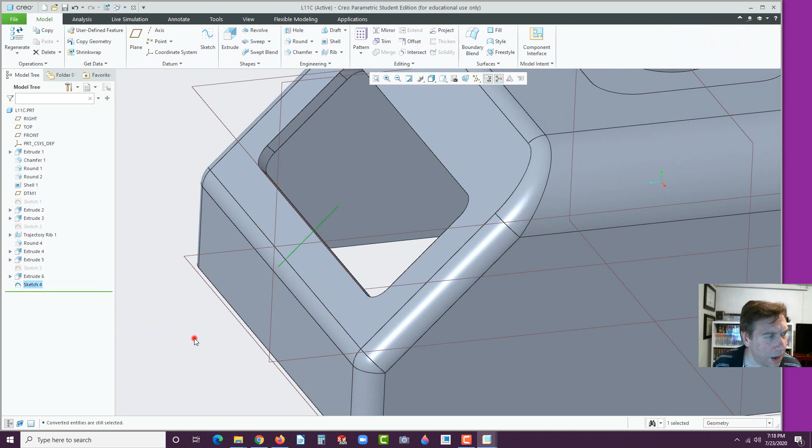So when you start this model, you start a sketch on this surface. What you do is you take the center line and find that point. See right there, there it is, the reference. And draw a horizontal center line. And then you could dimension between that and the opening. So anyway, there's an additional offset on this. I'm not going to go ahead and do it.

This is about as far as I'm going to go with this model, but just be aware that's a little trick without having to calculate it mathematically, which isn't a big deal. But if you want to use the CAD system, there you go, there's a little trick. And if you have a different way, by all means, share it with us below. But this one I just thought of off the cuff.

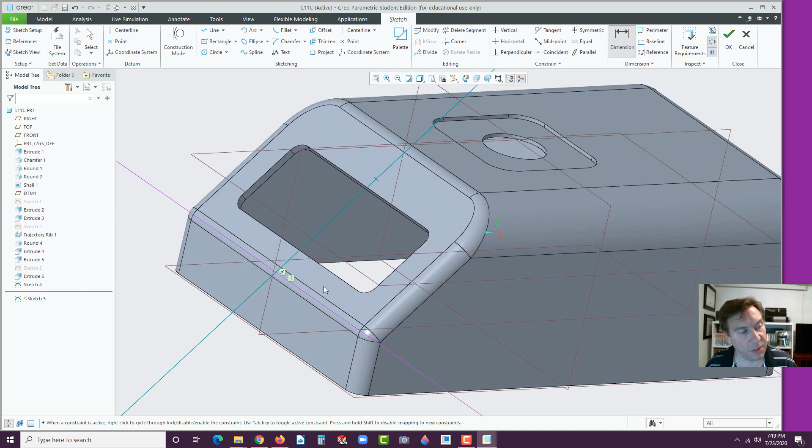And then there's some other features like little cutouts and things like that. I'm going to leave it up to the students to complete those things on their own. That completes this exercise.